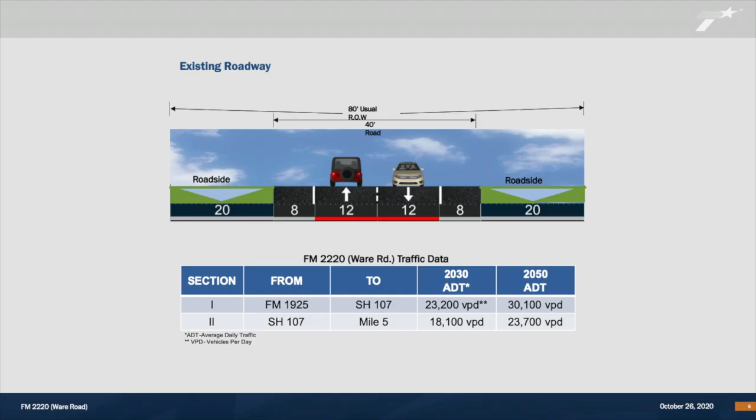Traffic is separated into two sections as shown on the screen. The first section, from 1925 to SH-107, is projected to have 23,200 vehicles per day in 2030 and is projected to be 30,100 for 2050. The second section, from SH-107 to Mile 5, is projected to have 18,100 vehicles per day in 2030 and is projected to be 23,700 for 2050.

Due to new development in the area and the existing conditions of the roadway, there has been a reduction in mobility, an increase in congestion, and an increase in crashes. In addition, the project will provide sufficient drainage of stormwater runoff for the newly proposed roadway. In the last 8 years, there have been a total of 168 crashes reported along this section of FM 2220.

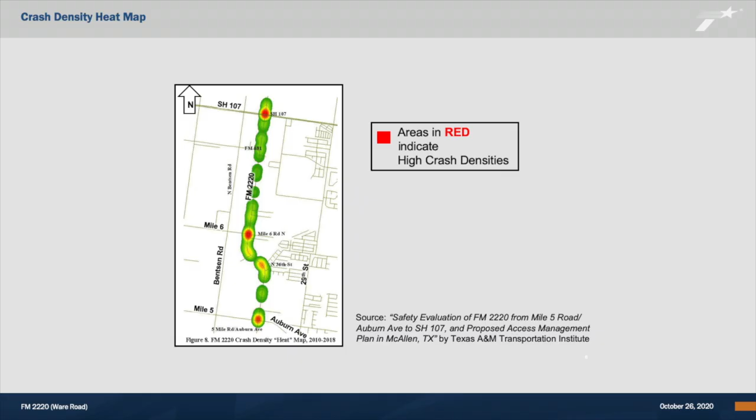A safety evaluation study was previously completed by the Texas A&M Transportation Institute. The areas shown in red on this map are where the highest number of crashes are located. As you can see, the intersections at Mile 5, Mile 6, and SH-107, as well as the curve between Mile 5 and Mile 6 are the crash hotspots.

The project is being developed to improve mobility, reduce traffic congestion, and reduce crashes and improve safety for vehicles and pedestrians. Two alternatives were studied and considered for this project, the no-build and the build alternative. Evaluation criteria of the alternatives considered impacts to the human and natural environment. The no-build alternative is required for consideration during the environmental study and is carried forward as a baseline for comparison.

Under the no-build alternative, the existing roadway would not be reconstructed or widened. The existing conditions of the roadway would remain the same. No improvements will be made to improve pedestrian or vehicular mobility, congestion, or safety. No improvements will be made to the drainage ditches. The no-build alternative is not recommended because it would not meet the need and purpose of the project.

Under the build alternative, the proposed improvements will be able to reconstruct, widen, and realign the existing roadway, improve existing intersections, and clean and widen existing drainage ditches to mitigate stormwater runoff that will be created by the roadway improvements. The roadway improvements would require 64.9 acres of new right-of-way, and the drainage ditches would require 37.3 acres of additional right-of-way. It is anticipated that these improvements would require approximately 12 residential relocations and no non-residential relocations are anticipated. The build alternative meets the need and purpose of the project.

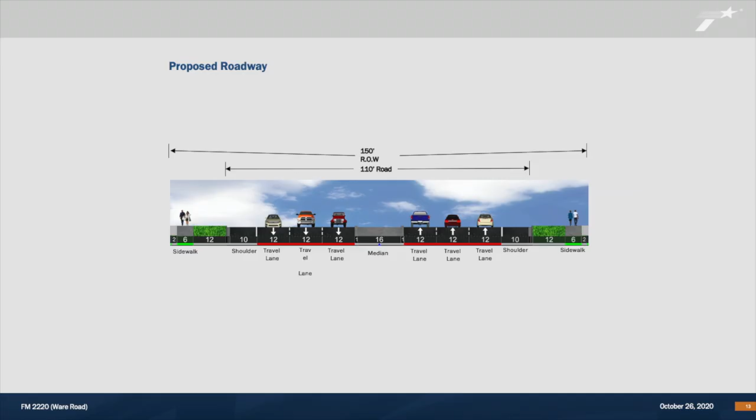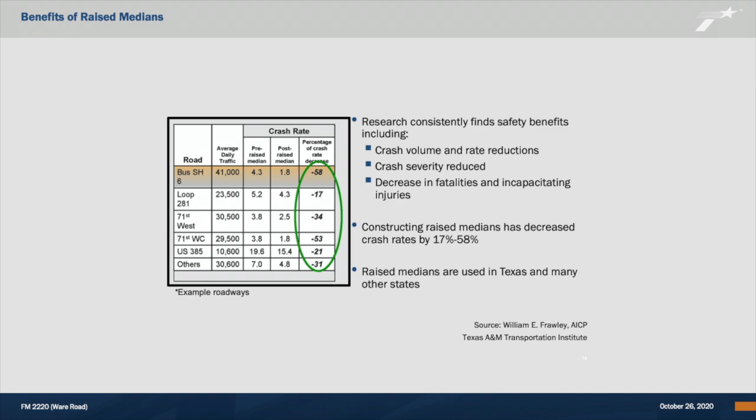Research completed by the Texas A&M Transportation Institute consistently finds that raised medians provide safety benefits, including a reduction in the number and rate of crashes, a reduction in the severity of crashes, and a decrease in fatalities and incapacitating injuries. The construction of a raised median has decreased crash rates as much as 58%. Raised medians are present in Texas and other states. Examples of local roadways containing raised medians include FM 2220 from I-2 to Mile 3, SH-107 from Business 281 to FM 2220, and Nolana Loop from Veterans Boulevard to FM 1426.

The project proposes a 16-foot wide concrete raised median to improve safety due to high projected traffic numbers and accidents. Medians are designed to enhance traffic flow with less interruptions from the minor streets and less frequent turning movements. Less turning movements help limit the number of potential conflict points at driveways and intersections. Conflict points shown in red on this slide are the potential ways a traffic impact could occur. The inclusion of a continuous left turn lane would have a total of 13 conflict points, shown in the left picture on this slide. A median would reduce the number of conflict points to 2, picture on the right, thereby improving safety.

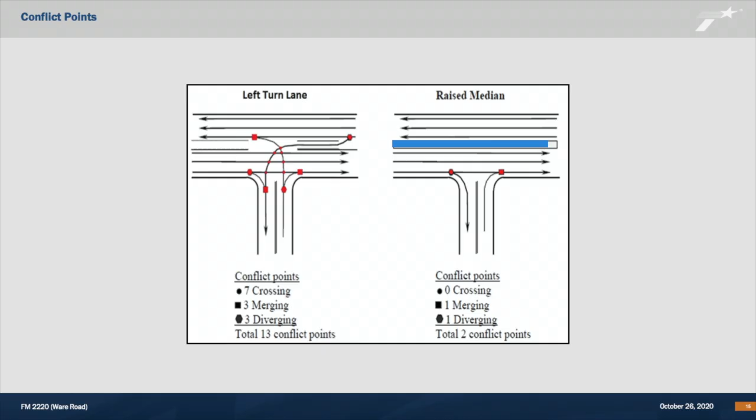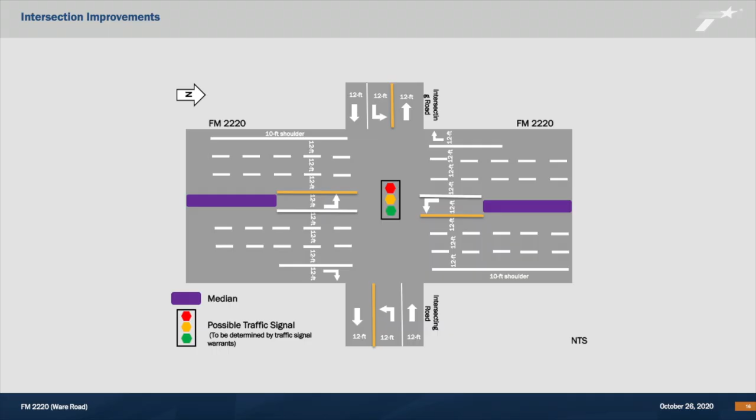Intersection improvements are being proposed at Mile 6 Road, Mile 7.5 Road, and Mile 8.5 Road. This depicts the layout of the proposed improvements. Left turn lanes will be provided on the intersecting roads and on FM 2220. In addition, a right turn lane will be provided on FM 2220. Traffic signal warrants will be conducted at Mile 6, Mile 8.5, Mile 7.5, and FM 1925 to determine if traffic signals will be needed. Existing traffic signals at Mile 5 Road and SH 107 will be modified to accommodate the roadway improvements. The intersection of FM 2220 and FM 1925 will be realigned to the west to correct the existing offset alignment. The existing section of FM 2220 would be handled by others.

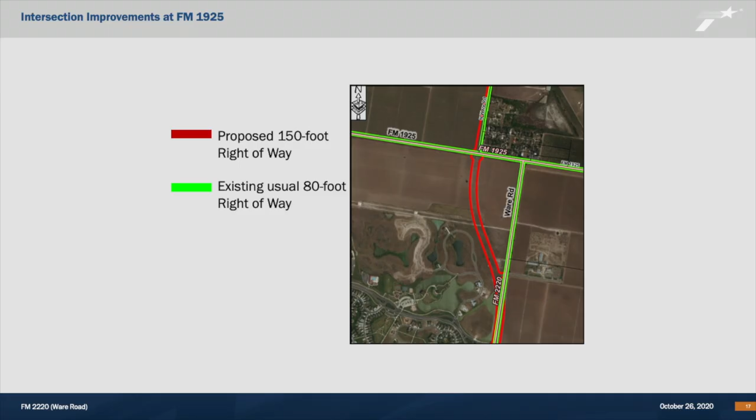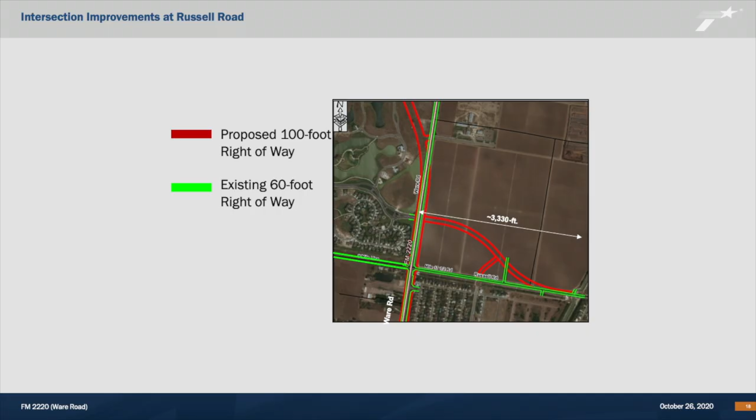Russell Road would also be realigned from FM 2220 east for approximately 0.6 of a mile. The existing section of Russell Road would be handled by others.

A meeting with affected property owners, or MAPO, was held on November 14, 2019 for property owners located along an approximate 1 mile portion of FM 2220 between Mile 5 and Mile 6. A realignment is proposed to straighten the existing curve. The purpose of the MAPO was to provide options and receive comments on the realignment of the existing curve. A total of 4 options were presented, including the no-build option.

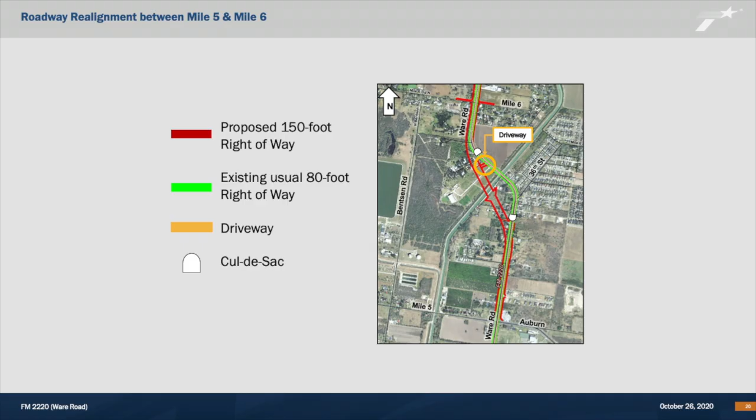The existing curve would remain as a local street with a cul-de-sac at each end. Access to FM 2220 would be provided by a 28-foot wide driveway located approximately 1,000 feet north of 36th Street.

In consultation with Hidalgo County Drainage District Number 1, the project would include the cleaning and widening of 3 existing drainage ditches. Each drainage ditch would be widened to a varying 50 to 185 feet wide within a varying 80 to 250 foot wide right-of-way. A total of 37.3 acres of new right-of-way will be required for the ditch improvements.

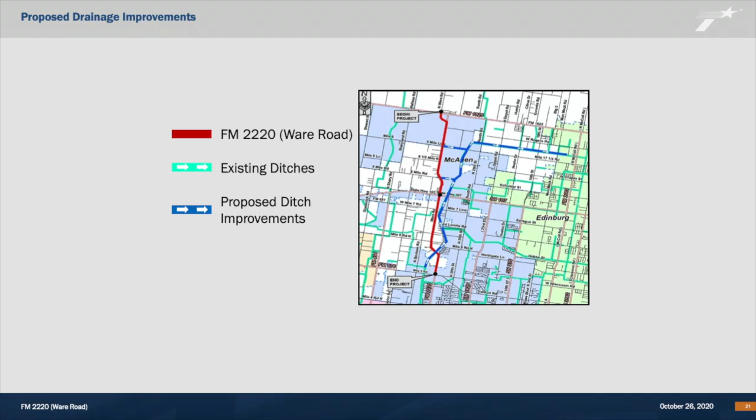The right-of-way acquisition process will follow federal and state laws and policies. The Uniform Relocation Assistance and Real Property Acquisition Policy Act of 1970, known as the Uniform Act, is a federal law that is followed for appraisals, negotiations, and relocation of families and businesses.

TxDOT is the agency responsible for acquiring the additional FM 2220 right-of-way from individual property owners and relocating any families or businesses affected by the project. The City of McAllen will be responsible for acquiring the right-of-way on Russell Road and the drainage ditches.

This project is listed in 2 sections within the RGV-MPO's Metropolitan Transportation Plan and the 2021-2024 Transportation Improvement Program. Both sections are listed in fiscal year 2024. The project has a total of $36.2 million assigned for construction.

The next step in project development is to review and evaluate all the comments received during the comment period and finalize the schematic for approval. Project development will continue by finalizing the design and obtaining environmental clearance. We anticipate receiving clearance by winter of 2021. Once environmental clearance is issued and the right-of-way map is complete, TxDOT will begin acquiring the necessary right-of-way. As mentioned, the project would receive bids for construction in fiscal year 2024.